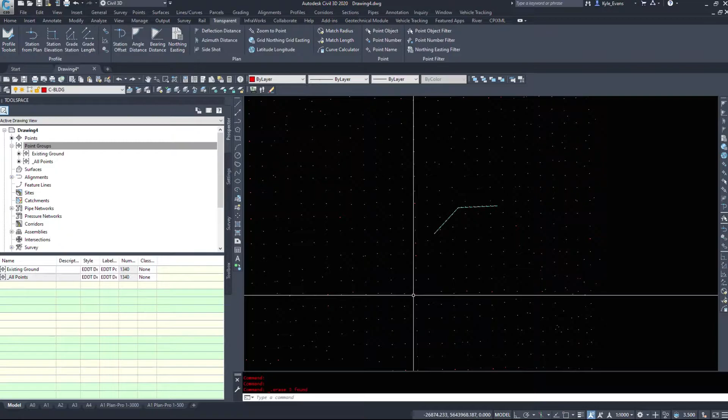We're going to continue on with the transparent commands, and in this short video we'll focus on the point related transparent commands having to do with survey points - zooming to points, specifying stations and offsets, and point locations within your drawing. This can be very handy if you're trying to track down a point or connect a bunch of points together. The survey database can be set up to do this, but sometimes we don't have time for that and just want to do it quickly on the fly.

Taking a look at the point related commands, the first one lets us specify a point location using a point number, so we can connect a bunch of points together. We'll run that command first. I'm going to start with a 3D polyline - you can use a 3D polyline for a break line afterwards, turn it into a feature line, or specify offsets for your corridor targets.

Now, starting the 3D polyline command, I'm going to access the point number command. The point numbers in my drawing are quite large, in the 18,000 range. Say I want to connect these five points together - I could do this manually clicking with the node snap, but you do have a chance of missing it, which can cause issues. So I'm going to type in the numbers.

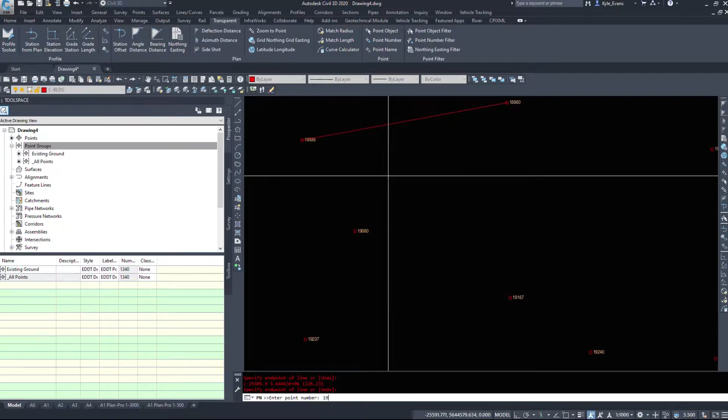18,935, and then it asks me for the next one - 18,860, and it connects the two together. 19,167, 19,237, 19,080, and then finally we can hit escape and close this command.

Now if we look at this 3D polyline, we see that it has picked up elevations from the points. So this is a representation - we can pull information out of points and put it in a 3D polyline without using the node snap.

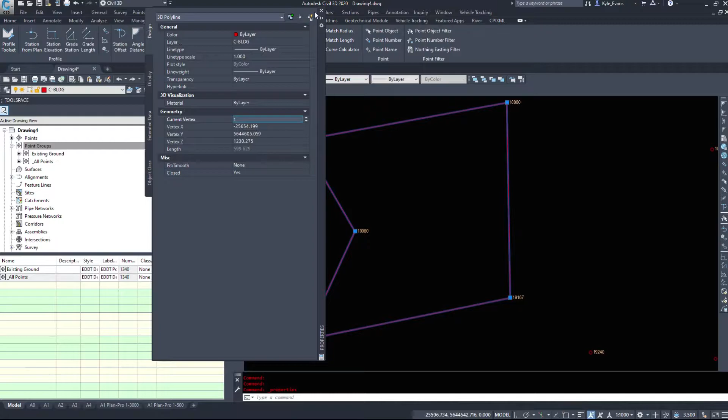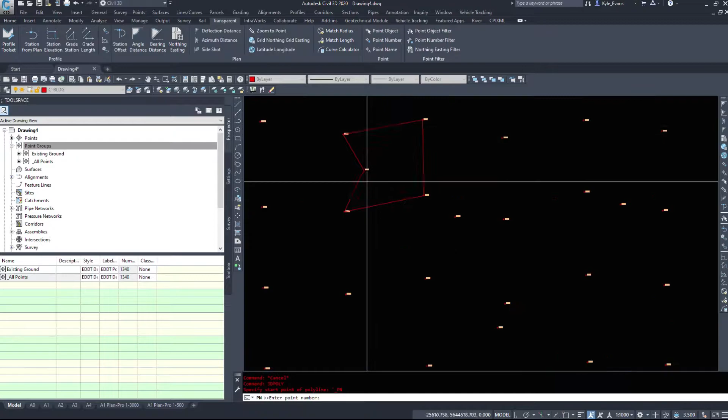Another good thing with this command is if our numbers are sequential. I'm going to run the 3D poly command again. Now on this kind of surface, this might not be a good idea, since I don't know where the points are - but this will also work on a range of stations. So if I go 18,935 to 19,080 and hit enter, it connects all the points in order sequentially. As we see, this is not the best idea for a survey of this kind.

So I'm going to take a quick look at my properties - point 1, point 2, back to 3, back to 4, 5, 6, 7 - and we see it jumps all over the place as it goes back and forth locating these point numbers for us.

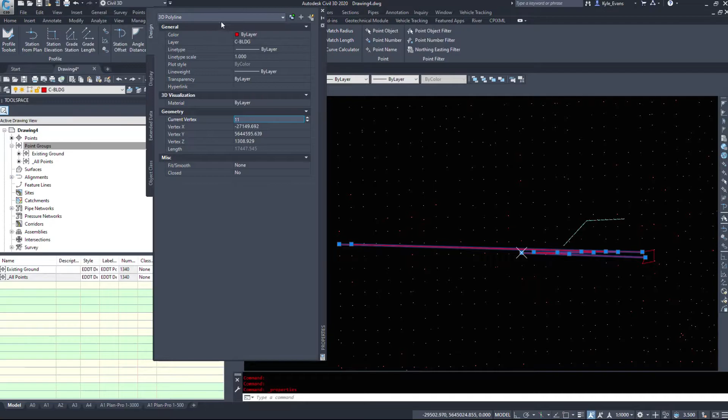This will be a lot more handy if your surveyor has actually picked up points in order - they walk down the edge of the road picking up edge of curb point number 1, point number 2, point number 3 as they progress. This doesn't work if they go edge of curb, center line, other edge of curb, zigzagging back and forth across the road. However, we do have a handy way of connecting those points together, as long as they are in sequential order.

I'm just going to hit escape to cancel the command, and we'll take a look at the second button here - specify a point location using a point name. If your points are named, this is handy and useful. When I inserted these points, they didn't get named, so I've created a couple of names that are just P1, P2, P3. I'm going to start my polyline command again.

I'm going to run the point name command. Now I have P1 to P6 in my drawing - I don't have a clue where they are, but I can start typing. So if I want to connect point 1, oh, there it is right in the middle of my screen. Connect to point 2, point 3, point 4, point 5, and finally point 6. So if your points are named, we can utilize that as well.

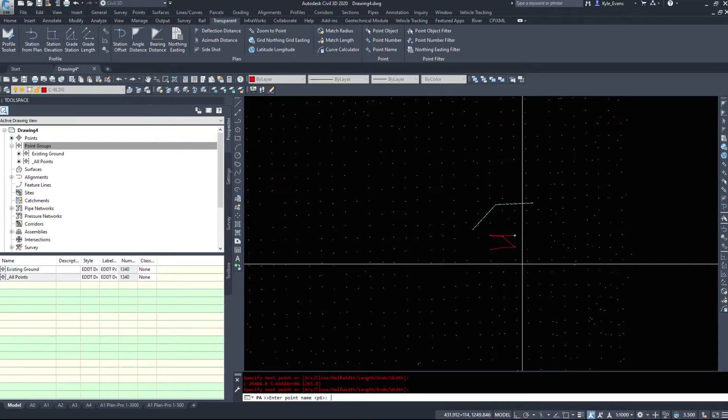A really useful command again, if your points are named. Taking a look at the next button - specify a point location by picking an existing Cogo point. Again, we can do the 3D polyline, or a feature line, or draw an alignment along these points - really any command. We can connect points together with pipes, and utilize our utilities inside of this. So it says specify start point of polyline - I'm going to click the point object command.

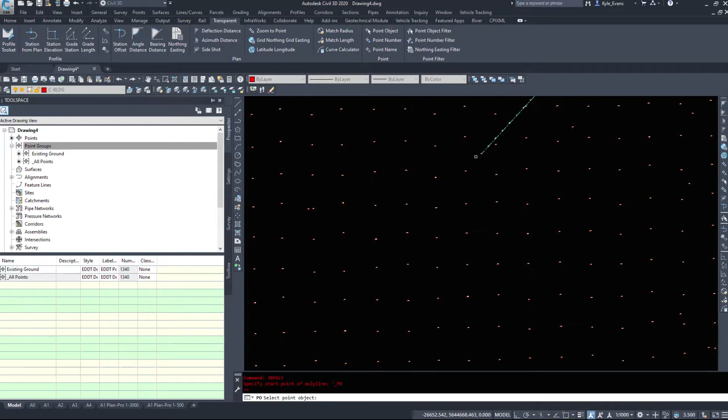And then I'm going to zoom in. Again, we could always do this with nodes. Using the node OSnap, just draw a polyline. You do have a chance of missing it.

With this command, we can click anywhere on the point itself. So I'm going to select this point, select the next point, and click whatever points I want to connect. I could also use either a crossing selection window set, or select the point itself.

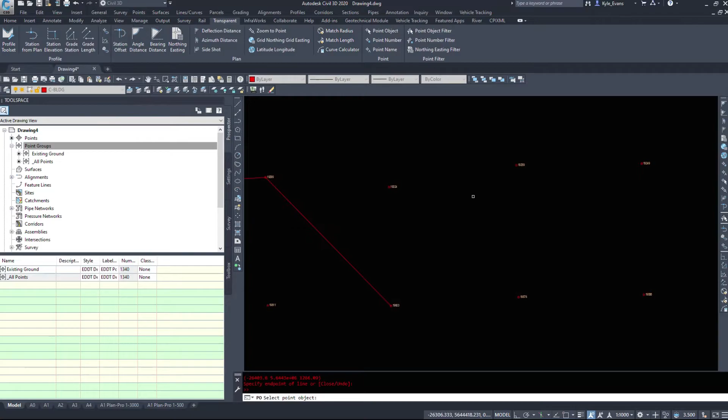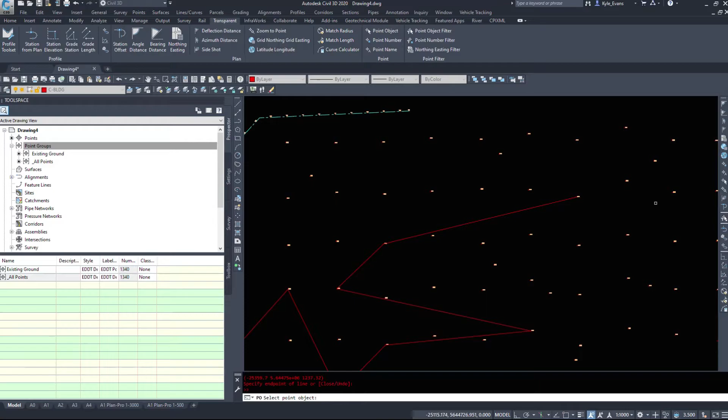However, when you do select a large number of points, the one you get seems to be pretty random. It doesn't always select the lower left one, it doesn't always select the upper right one. In this case it does seem to, maybe it always selects the lower left one - no, that one selected the bottom right one. I'm not sure how it deciphers. However, I would not go through and select points with just a window like that.

The next handy command is zoom to point. So say you contact your surveyor and they say, oh yeah, point 20,099, I need you to take a look at that. It seems to be a low point on the surface.

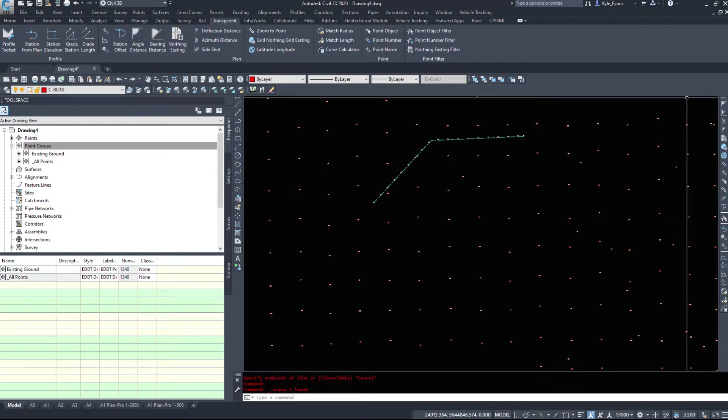By all means, we could go through our tool space, scroll down to wherever 20,099 is, right click and zoom to. So we could do that, and I know I didn't select 20,099, but it takes a bit of time. It would take a good minute maybe to go through this list here.

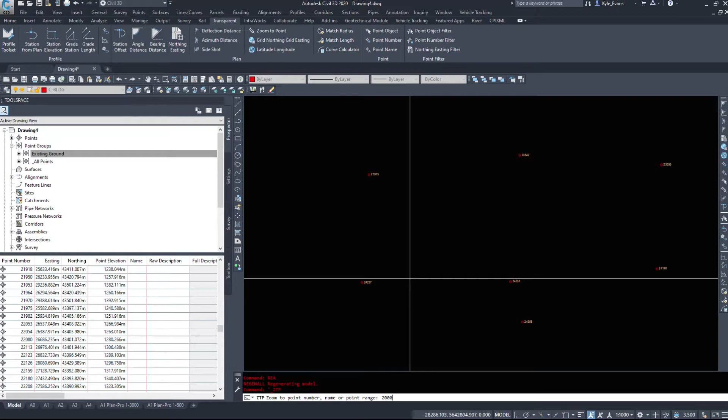Now sometimes we have to regen all for this next command to work, but I can type REA. I can select zoom to point and type in 20,099, and it will zoom me right to that point location. Doesn't matter where in the surface it is, where in the point file it is. And as we saw from the earlier command, the point numbers in this file are non-sequential, they are all over the place. It would be difficult to track one singular point down.

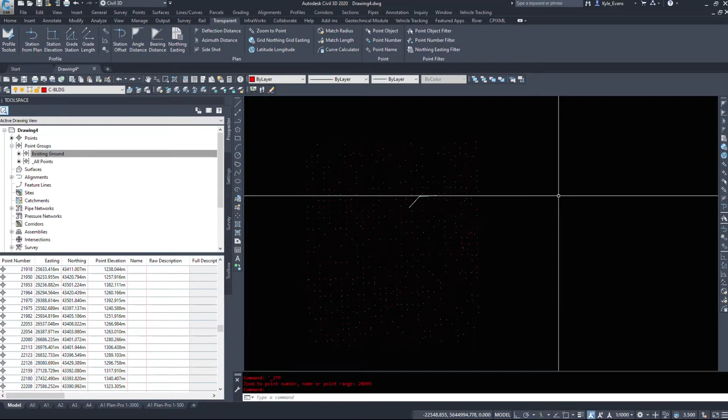The final button within the points category that we're going to look at is the station offset. Now we need an alignment for this next command to work. This could be useful for generating your ditch line or any targets for a corridor itself, a bottom of a retaining wall, bottom of ditch, any number of objects, a fence line even, if we know how far the fences are off the alignment. So again, any command, polyline, line, feature line, even utilities.

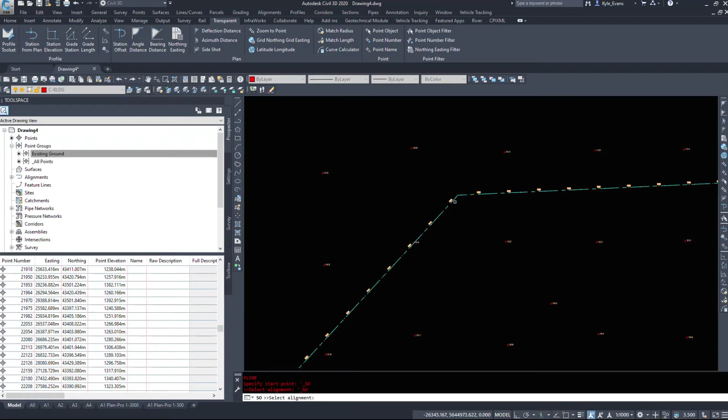We can specify utilities based on station offsets. I'm going to just use a simple polyline here, and I'm going to run the station offset command. So I'll select that, I'll select my alignment, and we have a graphical station picker here. So if we wanted to match an existing utility location, say we knew where a manhole was, we could select the station and offset based on the manhole if we wanted to connect to that.

We can also type in the station we want. So say I wanted station 400, and we have a graphical display as well. If I want to go to the left of my alignment, it's negative numbers. If I want to go to the right of my alignment, it's positive numbers. So say I wanted to go minus 46.5 to the left.

Then nothing pops up on the screen yet. Then we have to run the next station. So say we have around 550 as our station, and this time we're going 50.3 on the right hand side. So this should create a line that runs across the road. And it doesn't look like it did.

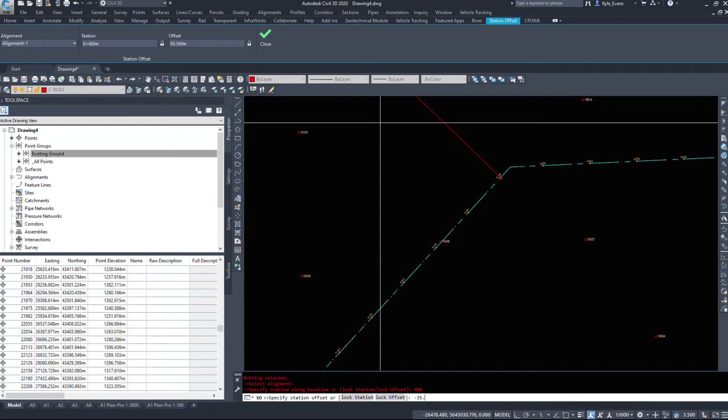So let's try and go back to 400 and minus 35.4. It says nothing selected. Alright, it looks like there's just a little bug in the command.

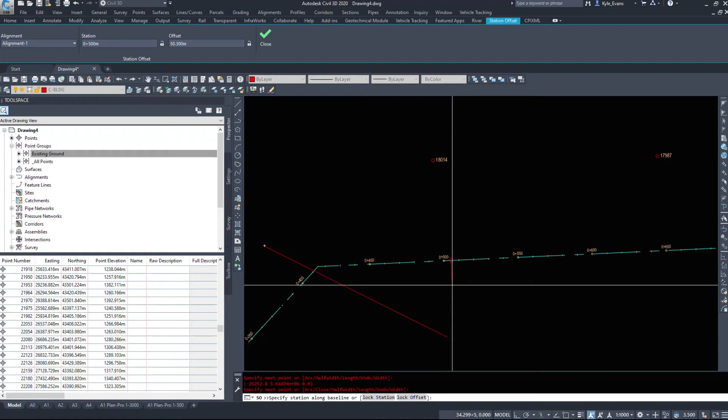If I start it again and run the station offset, I'll select my alignment, station 400, minus 35.6, then we get a graphical display on the screen where the point was being created. And if I go back over here to 500 and go 50.3, it does then connect those lines together. We can go then 600 with the offset of, we'll say 25, back to 700 with an offset of 300.

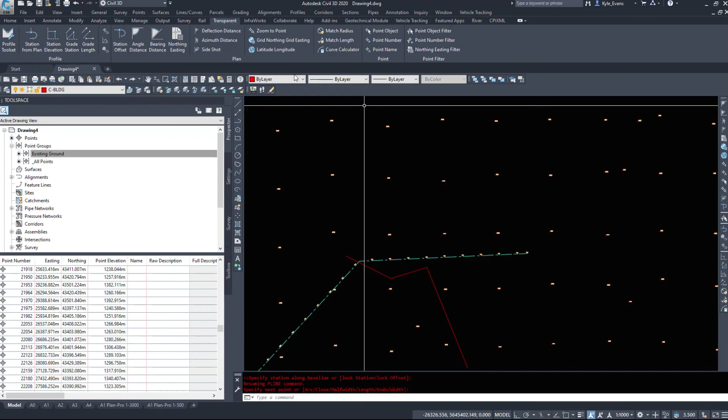So we can graphically go along the alignment, and we can sketch, say, an existing creek even, if we know stations and offsets, pipelines, utility locations, and we don't have to rely on trying to locate those with additional line work. If we know the station and we know the offset, those are easy enough to place in. So that was just a quick video on the point related options in our transparent commands.